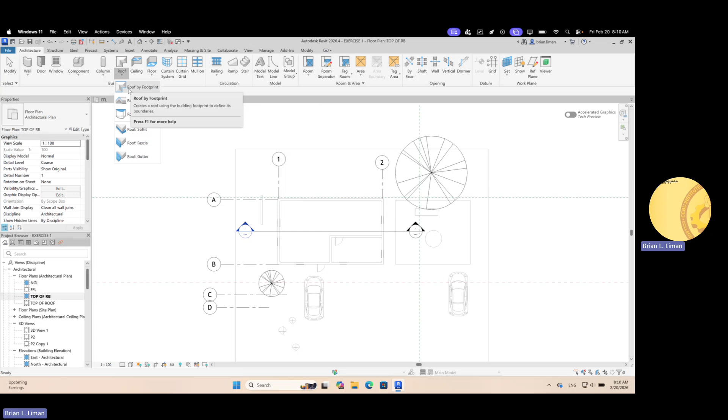Roofing is under architecture. You go to roofing, click the pull down arrow, then select roof by footprint. Then you can choose walls, if you have existing walls, or if not, you can also pick line. But since we have walls, we're going to make use of the walls.

Before you start making the roofing, there's the overhang. You have to set the overhang, that's 1 meter. By default, that is 0. Make sure define slope is checked so that it has slope. If it's unchecked, then there's no slope, it will be flat.

So we'll now start making the roofing. You just hover on the outside face of the wall. You click, left clicking of your mouse. Again, hover on the outside face.

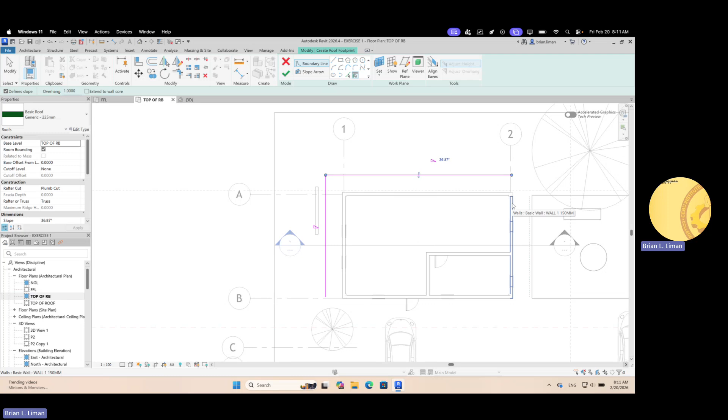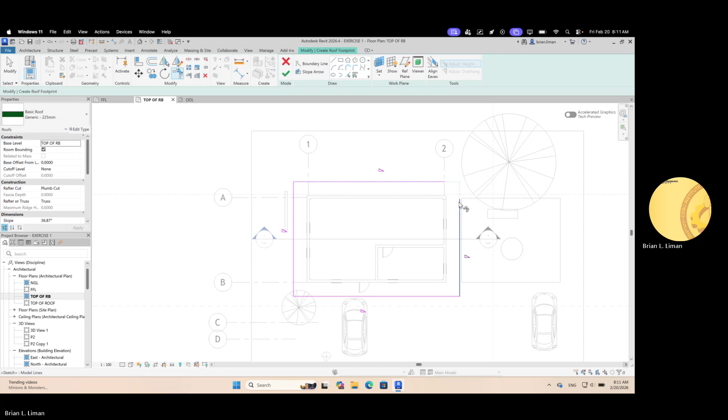In case you will encounter this scenario where the lines don't meet, what you will do is go here. This is TR, trim. You just click that one, or you can also type TR. Then click the lines. This is like fillet in CAD.

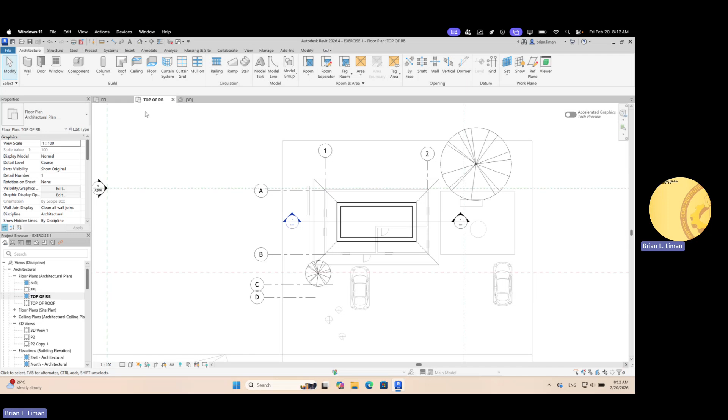Make sure all lines have this triangle. Again, the triangle means it already has slope. We'll check that, you click that. So it creates the roofing now. If we check the 3D, we have this roofing.

Now, we'll check the elevation, south architectural. So this is the roofing class.

We can adjust the slope. You just click the roof, click the roof class, and then here, under properties, you have the slope under dimensions. Let's say we set that to 25. Apply. Then it will change.